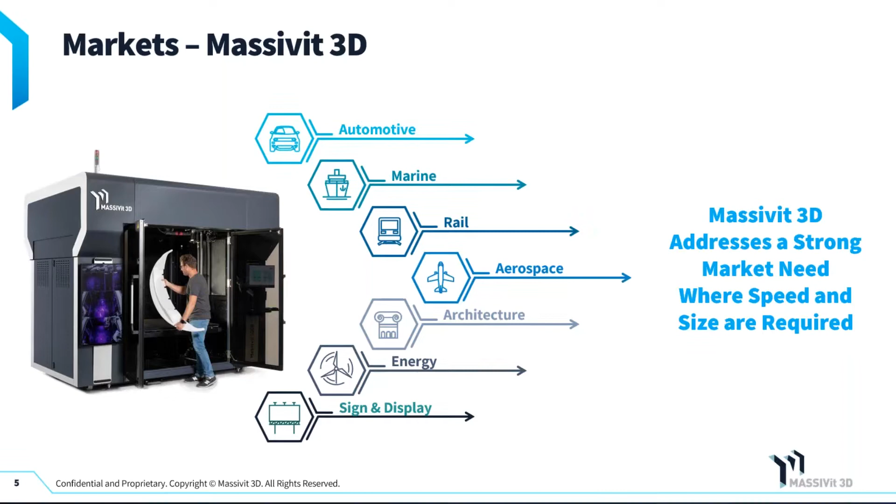Our first poll question is, how do you currently make molds? The options are hand layup laminated fiberglass, CNC machining, additive manufacturing systems, or I do not manufacture molds. Please take a moment and answer right on the screen and let us know how you currently make molds.

So it looks like 44% of our responders do not manufacture molds. Wow, so they may buy them from the outside, or they may just be curious about the technology. But this is going to help me shape my presentation a little bit. It's going to be broad in general for the entire audience, but it's nice to know what exactly is going on. However, 27% use hand layup and laminated fiberglass. Our research has shown that hand laminated molds are the most popular, cost-effective way, but it's still very labor-intensive and takes a long time. So we can review this again towards the end if we need to, but let's move on.

Whether you're machining a mold out of aluminum or tooling block, or using that tooling foam to make a master plug that you then make the laminated mold from, it's very labor intensive and takes a long time.

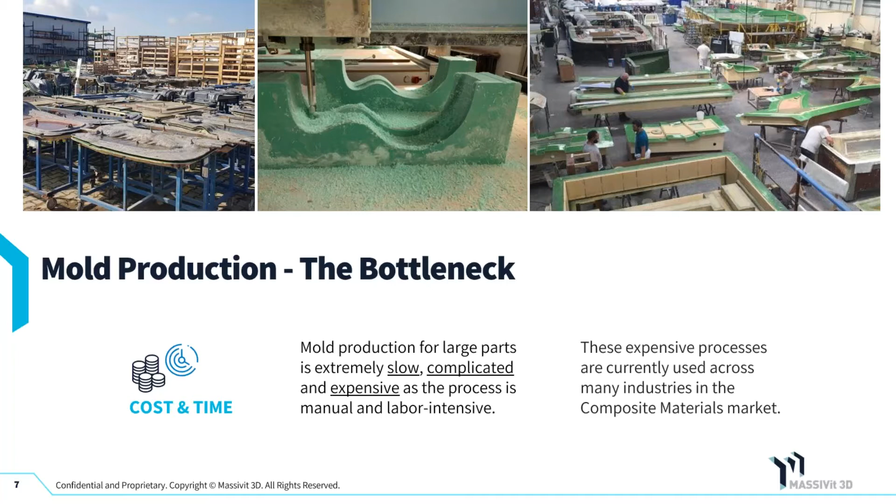So what we're hoping to do is take what you see on the screen here, which is some traditional manufacturing methods, and tighten it up. And what I mean by that is, right now, you go from CAD design, mold production to end part, and in a good year, it takes 5 weeks to make a mold. Sometimes it takes 8, 10, 12, 16 weeks.

If you are purchasing the mold from a vendor that just makes molds, what I've heard is the wait time is up to 30 weeks. Some of these vendors that are making molds for other people won't take new customers. They're so busy.

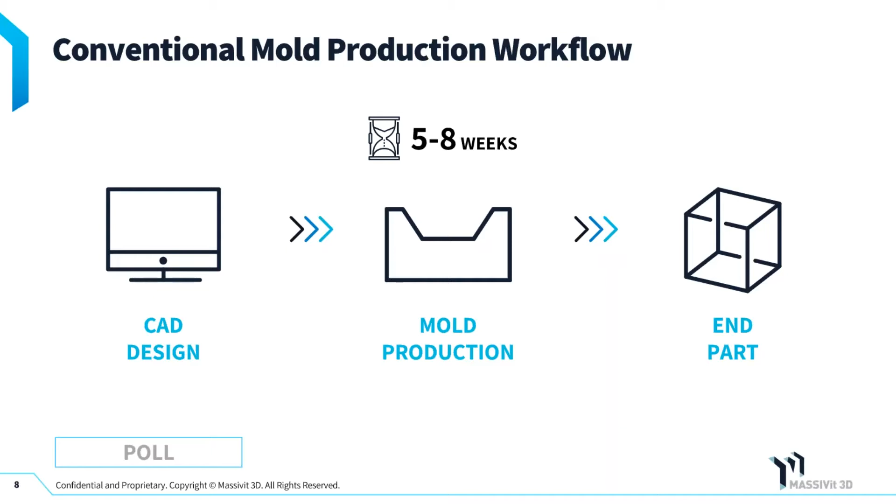So with that being said, if we break it down a little bit more, the mold building process of laminating a mold, from CAD design to having the mold ready to make a part, is a minimum of 19 steps. And I would argue that it could be closer to 35 or 40 steps. It depends on how you define a step.

What I mean by that is in the last step, number 19, prepare the mold surface. When you pull the mold off of the master plug, it still has to be buffed and polished, and then it needs to be sealed. So it needs to be cleaned up, and then it needs to be sealed. And then there's 5 or 6 steps of mold release on that before it's ready to make a part. So step 19 could be 5 or 6 steps.

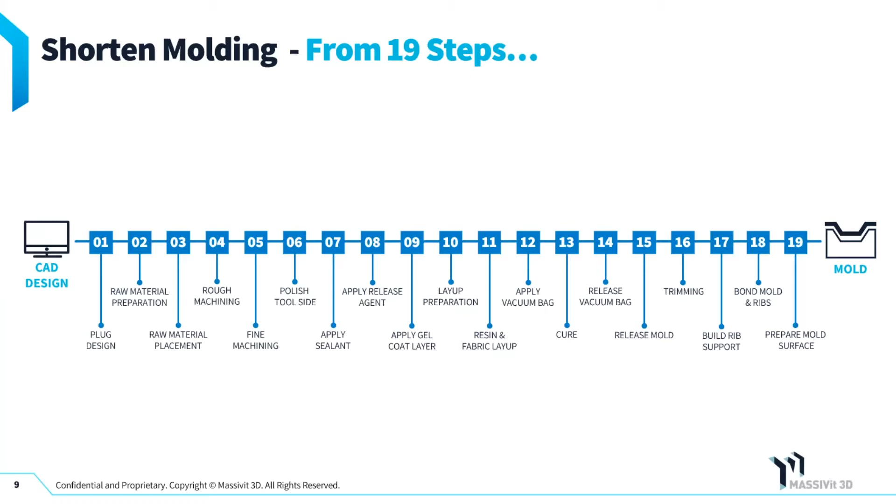So what we're trying to do is condense all these steps and remove as much labor as possible.

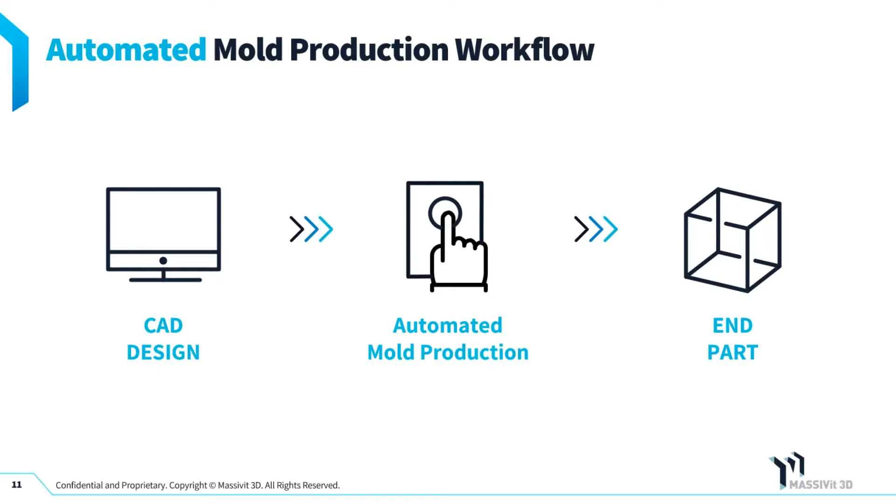So we're going to do that by automating the mold production. So CAD, 3D print, then you have your end part, which is not the part that's made from the mold, but the mold itself.

So here we couldn't eliminate every single step. What we have is we print it, and what we're using is a 2-part epoxy to make the mold. I'll explain that a little bit more in detail. But you want to post-cure that epoxy so you have better mechanical properties.

And then we need to somehow remove the outer material, what I call the shell, that formed the mold. We have a special chemistry in the material that does that. It's a water breakable material. And then when you're done, you have a mold, but like any 3D printed part, it's not a high gloss finish. So the last step is to finish the mold: sand, buff, and polish.

In some aerospace applications, our customers are machining the mold after it's 3D printed, and they're still saving a tremendous amount of time.

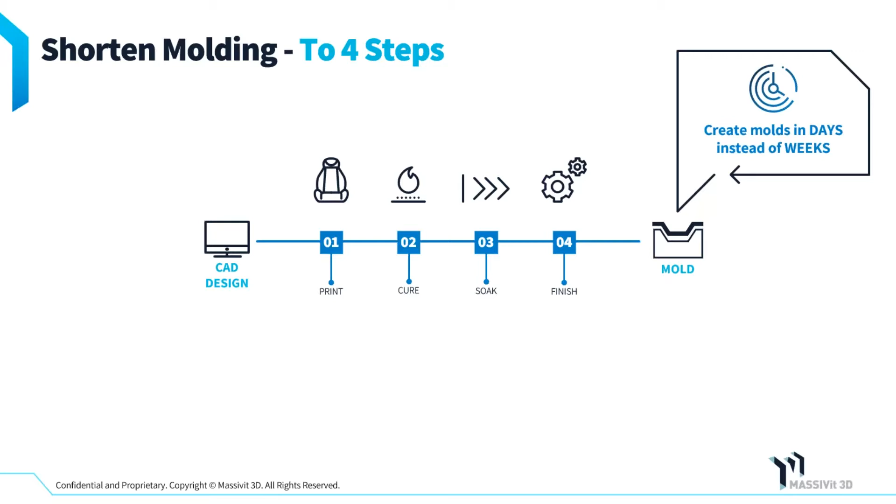So how does it work? This is where we're going to get into the nuts and bolts. The original technology we had was called GDT, gel dispensing technology. What that does is it dispenses a very thick material, almost looks like toothpaste, and it's UV cured instantly.

So what we're doing is we're printing about 8 to 10, 12 layers, depending on the size of the part, of the shell material, the UV cured material. And then it stops, that head moves out of the way, and we fill that gap, that shell, with a 2-part epoxy. It has great mechanical properties, but one of the key problems in 3D printing is the layers you create make for a weak part in the Z direction.

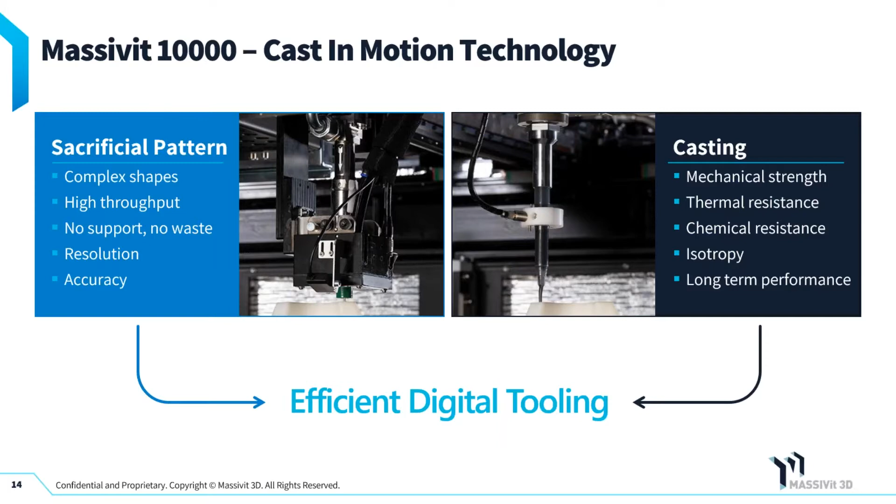So you see it here again, they flipped it over. On the right, you see the UV cured gel. It's called Dimengel 50 WB, water breakable. The original material for the GDP, the gel dispensing printing, is not water breakable. It's hard, like an acrylic. But we needed a way to easily get the mold out of the shell.

So they changed the chemistry to make it water breakable. Now they don't say water soluble because it doesn't break down into the water. The water literally makes it swell up and fall off. We'll show you some videos of this in a minute. So that's the Dimengel 50 water breakable.

On the other side is the Cast in Motion 155, or now we call it the CIM 500. It has a heat deflection temperature of 145 degrees C, just under 300, and it has a fairly low coefficient of thermal expansion. I know that's kind of ambiguous, but it's close to aluminum. It's around 25 parts per million for the CTE, and it's truly isotropic. We've had it tested by a third-party organization, and it's an isotropic mold.

So the thermal expansion in the X, Y, and Z are exactly the same. The tensile strength under compression is the same in X, Y, and Z. And it's something that hasn't been done in 3D printing.

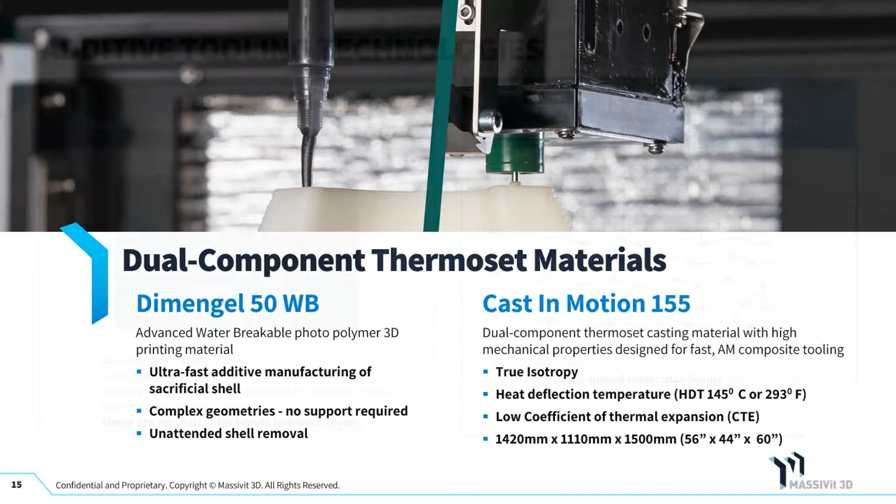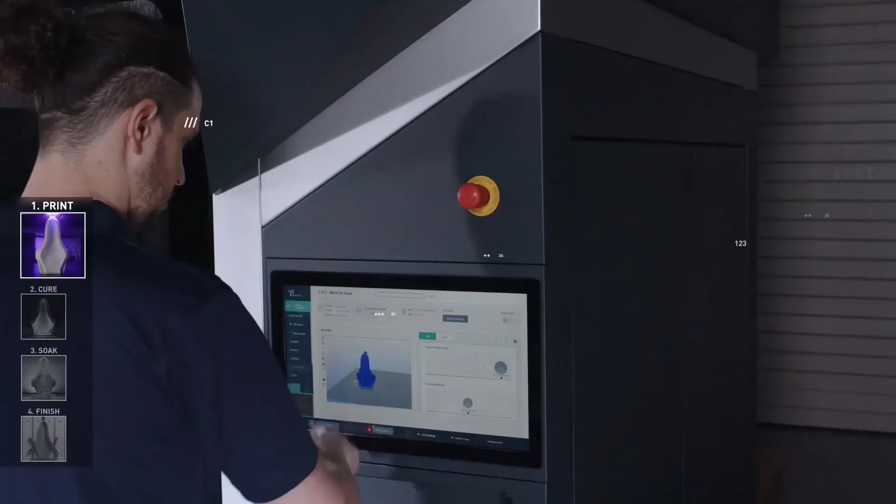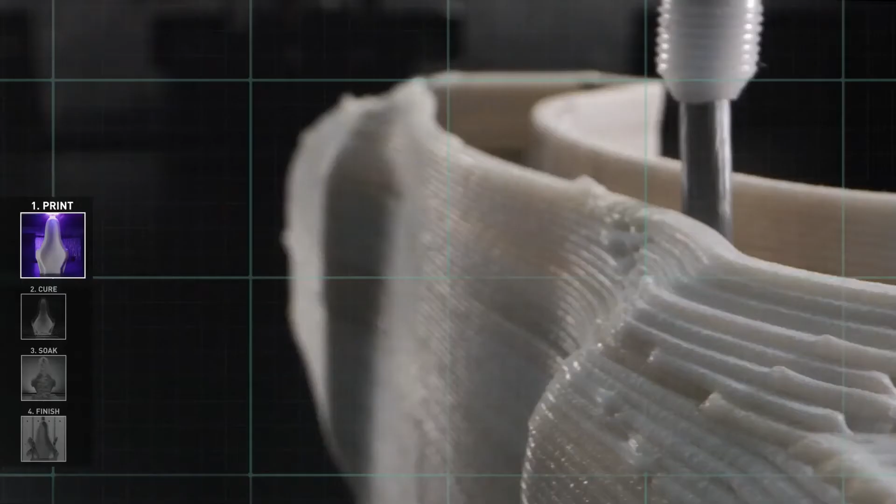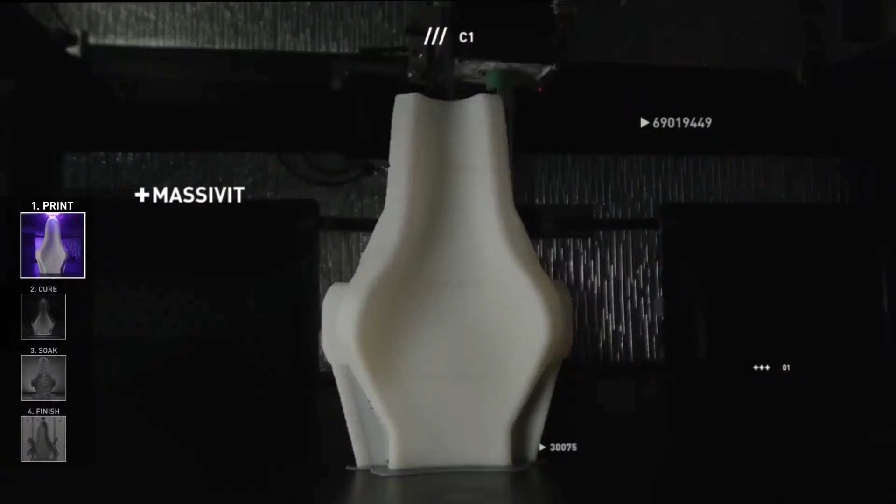Based on an initial CAD design, the first head 3D prints an outer sacrificial shell at high speed. The second head intermittently casts a thermoset material into that shell as it builds. The shell is comprised of two thin walls made of water-breakable photopolymer material that polymerizes instantly under ultraviolet light. The thermoset material forms a solid, isotropic mold. The mold can then be post-cured in an oven to improve its mechanical properties at elevated temperatures. It is then simply immersed in a bath of plain water, causing the shell to crumble away. The Massivit 10,000 offers near-net shape casting. Your high-temp, high-performance isotropic mold is now ready for use.

Okay, did that work? I mean, I saw it. Did everybody else see it? I sure hope so. Yeah, look great, Mike. Awesome, awesome. There is hope.

So what that showed was the shell being printed and then the pouring. We're controlling the exotherm, which also helps us be more accurate.

One of the typical questions I get from a prospective customer is, how accurate are your molds? Usually coming from the aerospace world, but we're about 1 millimeter per meter. Our system has rough standard dimensions: 5 feet in the X, 4 feet in the Y, and a little more than 5 feet in the Z.

Our main product, the GDP printers, are 6 foot in the Z because we don't need as much height. We lose some height with the Massivit cast in motion machine because of the static mixer for the epoxy.

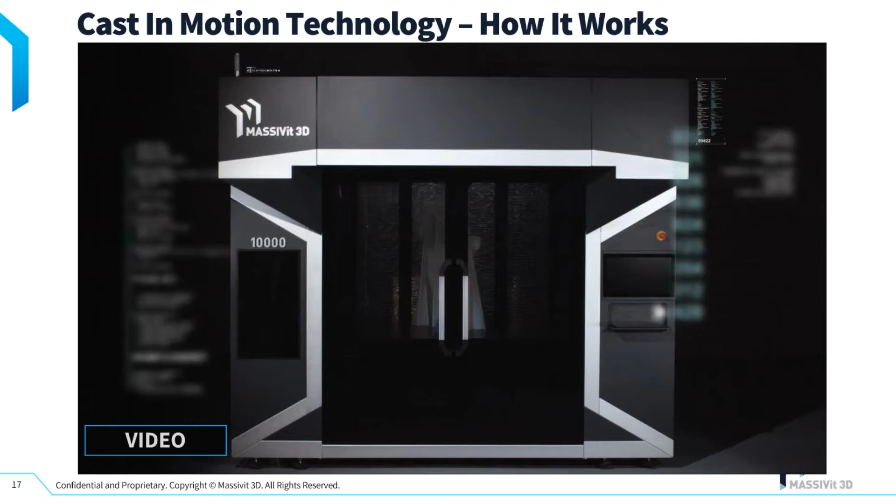So that being said, let's move it along. The key benefits in our system: we reduce the time by 80%, and labor cost, well, if you're hand laying up a mold, even if it's not a large mold, that's very labor intensive, from making the plug, to gel coating it, to laminating the mold, to pulling it off and prepping it up. We reduce the labor tremendously, and we're reducing the cost also.

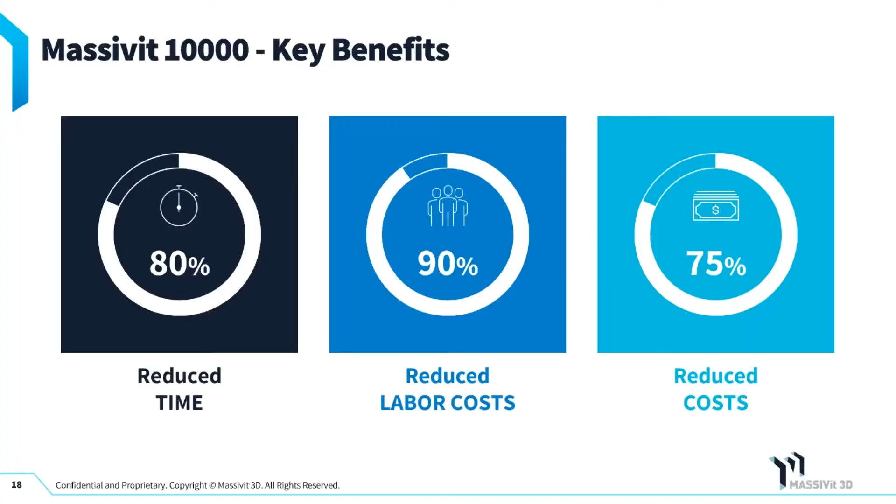So now I want to show you some samples of some of the molds that we've printed, and it's a good time to mention that this is a brand new technology. We have a beta customer in North America, a beta customer in Europe, and a beta customer in Israel. It's been fully vetted. We have reservations in the tune of something like 25 reservations, and we're starting to ship machines. So it's a new technology, but it's real. It's fully baked in. We have some wrinkles we're working out, but nothing that's slowing us down from shipping machines.

Here is a mold for a race car seat. On the left, you see the as-printed mold with the shell material on it. The center photo shows the mold with the shell removed, and then a part that's made from that mold. What I like to point out is the support structure that you can print into the part to save you even more time. A lot of times you'll get a mold and then it'll be backed up with square metal tubing, or 2x4s, or some other structure to make it more rigid and easier for the operator to make parts on.

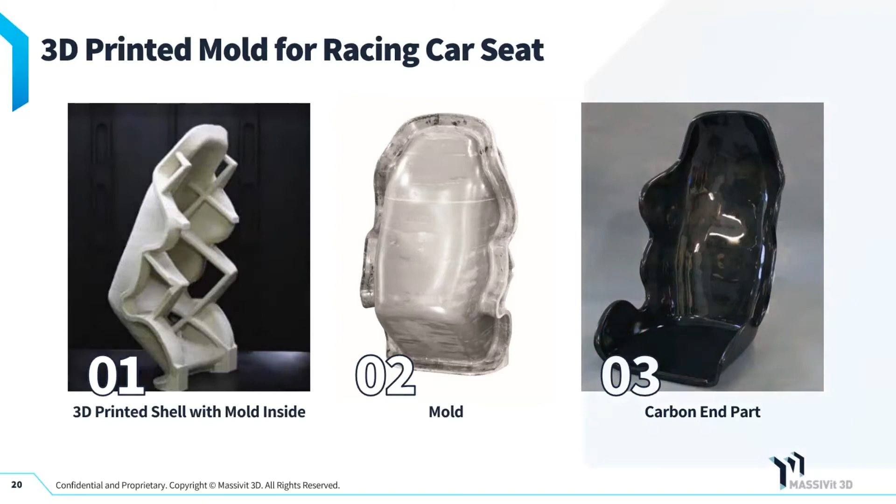But more importantly, it took 42 hours to print. So typically, after the print, regardless of the size of the part, it's going to take 10 hours to post-cure to get the mold material to ideal mechanical properties. And then it takes somewhere around 24 to 30 hours to remove the shell.

You just put it in a tank of water. There's no chemistry, no caustic chemicals breaking down the shell material. It's just tap water. There's no heat, no agitation. You just let it soak.

If you're in a hurry, after about 8 hours, you can start to pull the shell off. It's soft and gooey. But if you wait the full 24 to 30 hours, the shell material falls off the part and rests in the bottom of the tank. It can be strained out of the water, dried, and thrown away as a non-toxic, inert waste.

It's not a biohazard at all. It's inert. You could use it as a filler in asphalt if you wanted to recycle it, but it's not toxic. That's the main point.

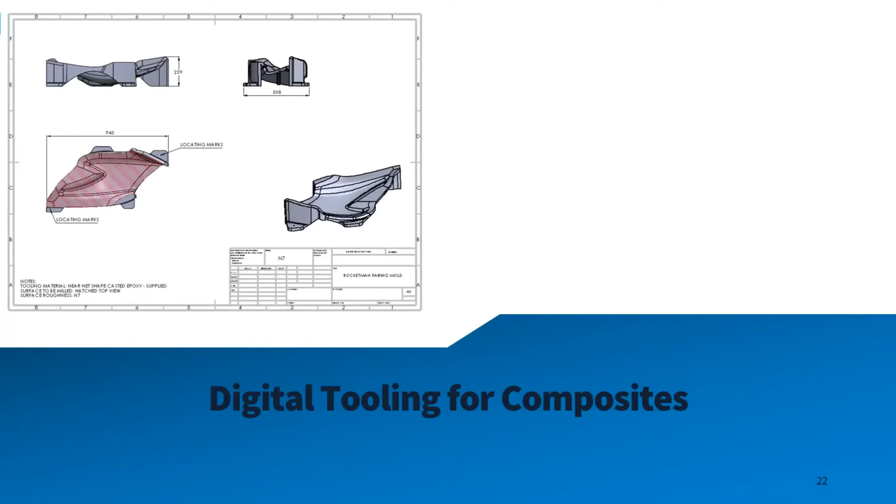Here's a print for a fairing on a motorcycle, and I think we're going to show you that one too.

So here's an example of the as-printed part on the left, and in the center what you're seeing is the part as it's breaking down in water. It's just slowly swelling up and falling off the part. And what you see on the right is the as-printed mold.

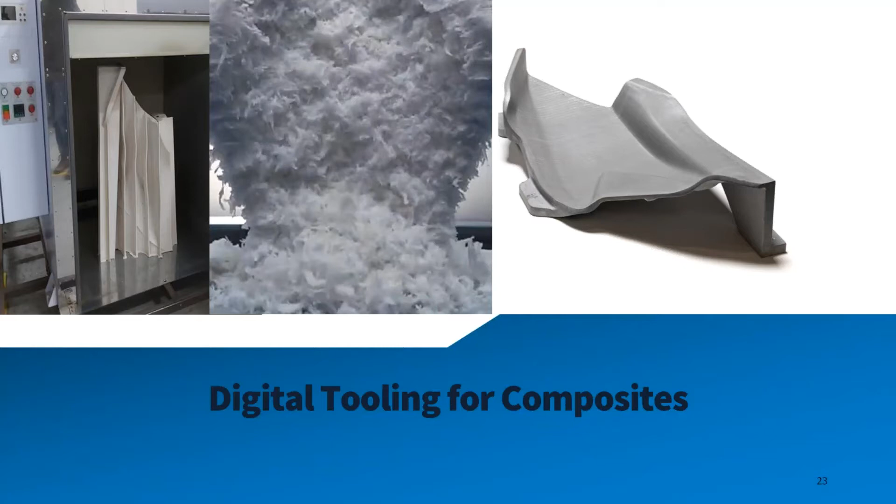It had to be cleaned up to make it a true mold. What I mean by that is the actual mold surface is smoothed, not the backside or the flange, but the actual mold surface has to be sanded, buffed, and polished. And that's what you see there on the right.

You can also combine certain features of the mold to have a tool in there. What we mean by that is, here's a bicycle seat mold. What we did is we mounted some inserts into the table, and then we printed around that.

That enabled us to have a good datum in the mold for finishing machining the mold. We also added some clamping features on the mold so that when you're machining it, you have a place to grab. So there's a lot of flexibility in creating features on the mold to make manufacturing easier, and it all can be done in the printer.

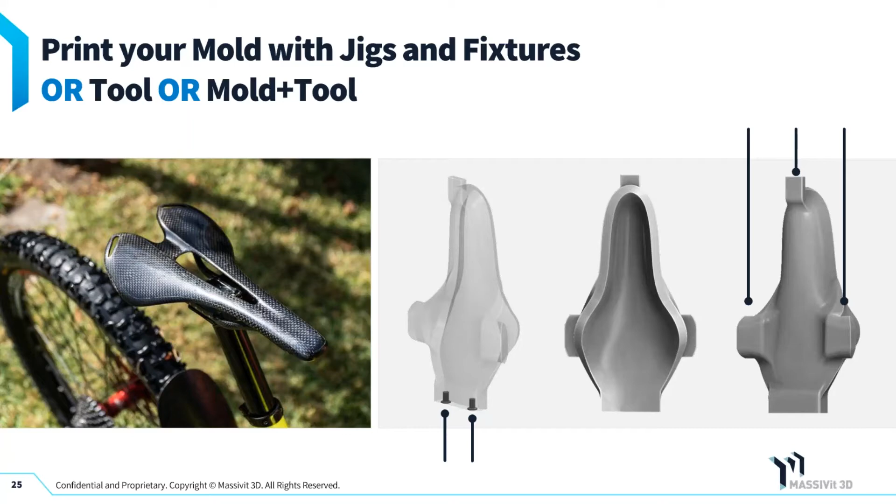Here's another example. We have an aerospace customer that needed a washout mandrel. The challenge was how do you get this core or mold out of an odd-shaped part, like ductwork? On the right, what you see is the 3D printed soluble material as printed, no epoxy, just the 3D printed material.

They make the part on the mandrel, on the part that was printed. And when the part is fully cured, you can soak it in water and remove the mandrel from the part.

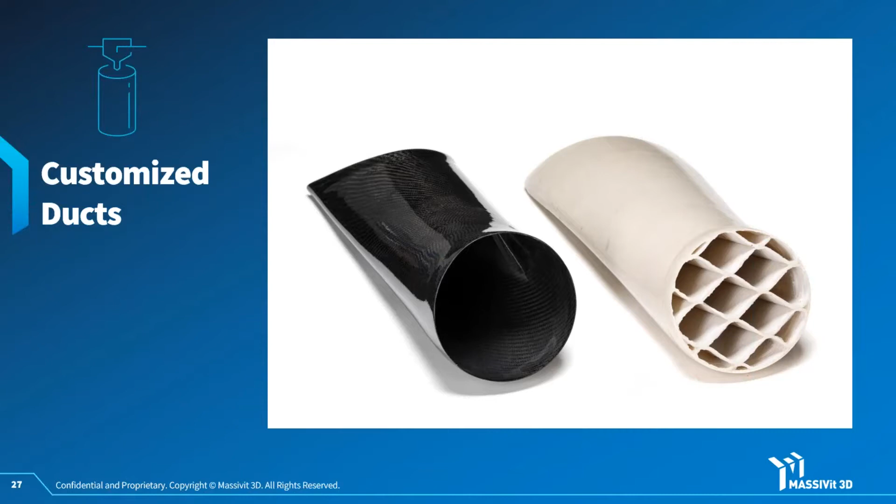Here's another graphical representation of a mandrel that you could not get out any other way but breaking it up or dissolving it in some way.

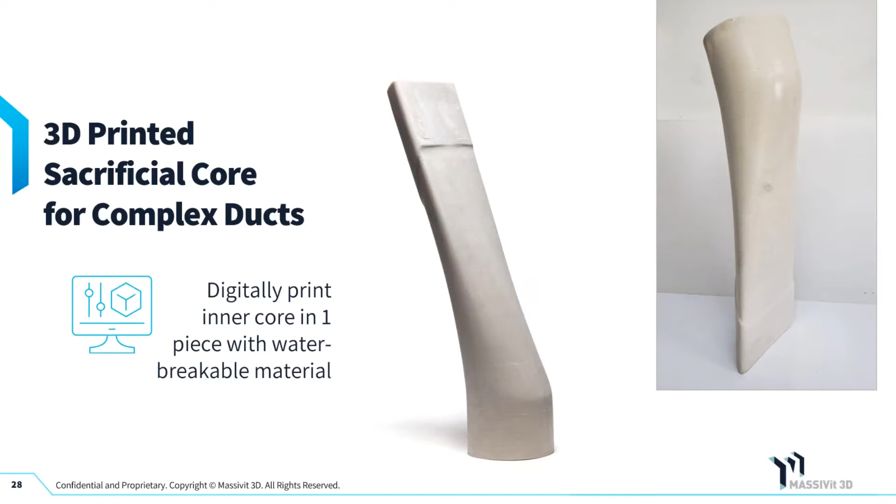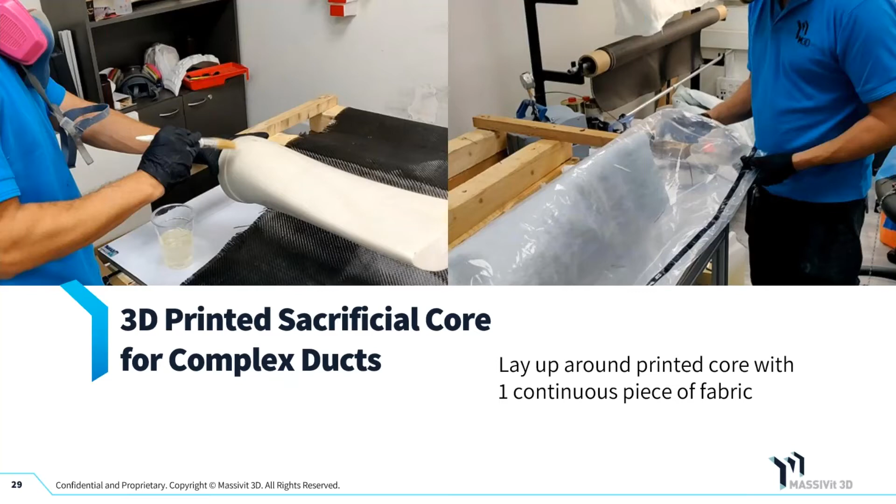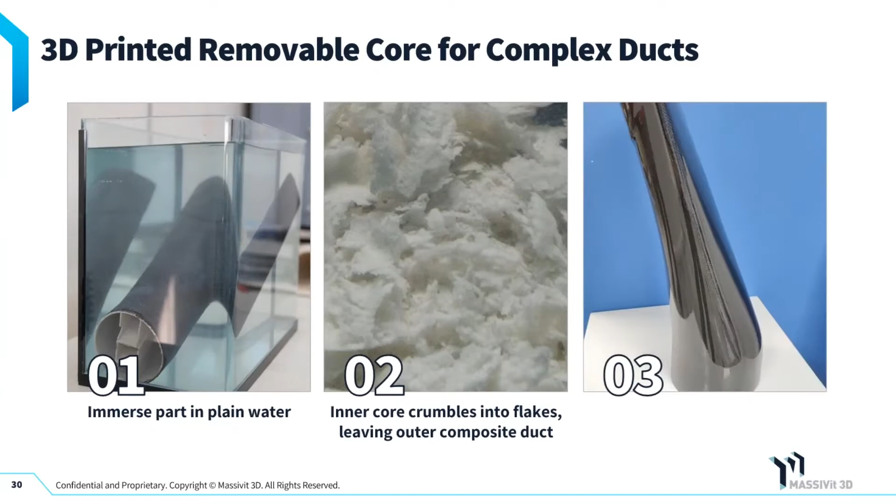Here is the mandrel. They did have to clean up the surface because it's as printed, and a 3D printed part has those layer lines, so they smoothed it. And here they're starting to lay up the part, then they bag the part, and then soak it in water. That's the breakdown, and what you have left is the part that you need.

Now I want to pivot a little bit, because our core technology of gel dispensing allows companies that don't even want to make a mold. They just want to make a part.

So now it's a different machine, not the machine that makes the mold. The machine that makes the mold is called an M10000. It's a mold tool builder, that's what it's designed for. It only runs the water-soluble, water-breakable material, and the epoxy.

But our original technology of gel dispensing allows you to do things like make a console for a boat, a center console or a helm, maybe for a customer who is handicapped and has certain ADA requirements, or maybe he just wants features a certain way and you don't want to make a mold just for one customer. You can 3D print that part and then glass over it, gel coat over it, and you have that part. I know there are other traditional ways of doing that, but this is a lot faster.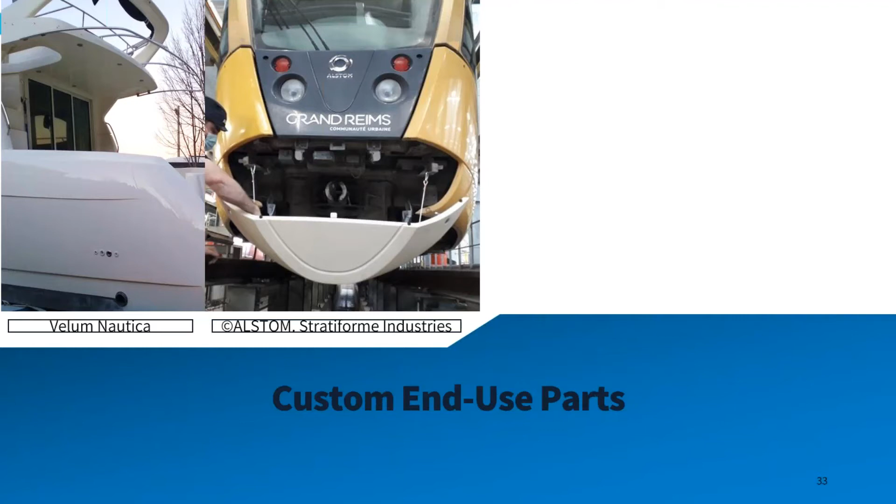We also have some legacy rail parts for Alstom that they don't have the molds anymore to make. We 3D printed it. The material is fire retardant. You glass over it with fire retardant resins and pretty it up, and now you have a part without having to make a mold for that one part.

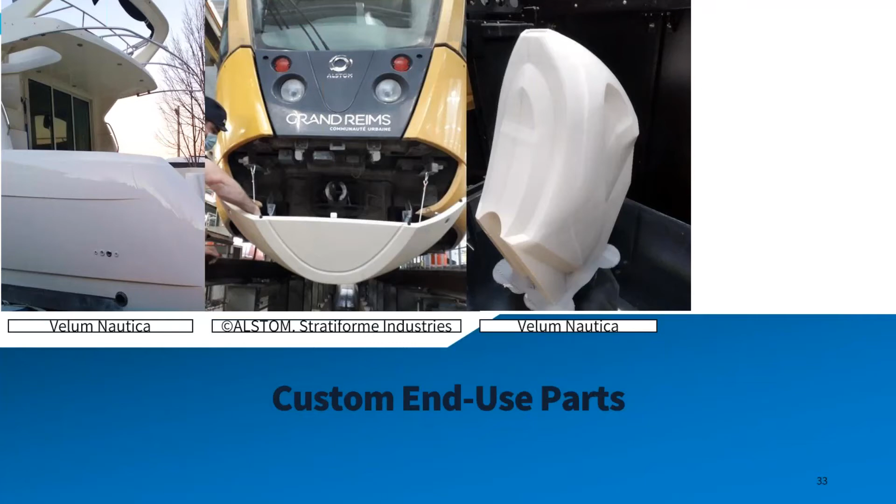Some more examples of what Velum Nautica is doing for marine, a special design part that they're going to bond onto a boat. You can also see on the right another part that Velum Nautica was designing.

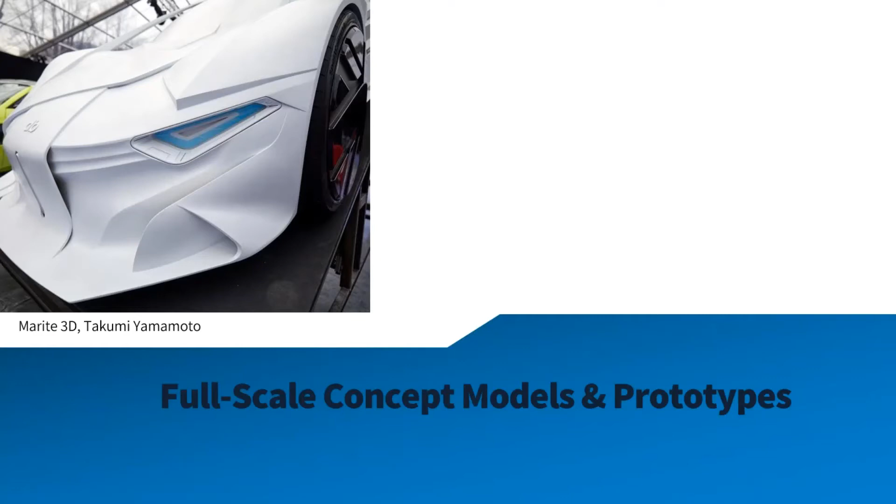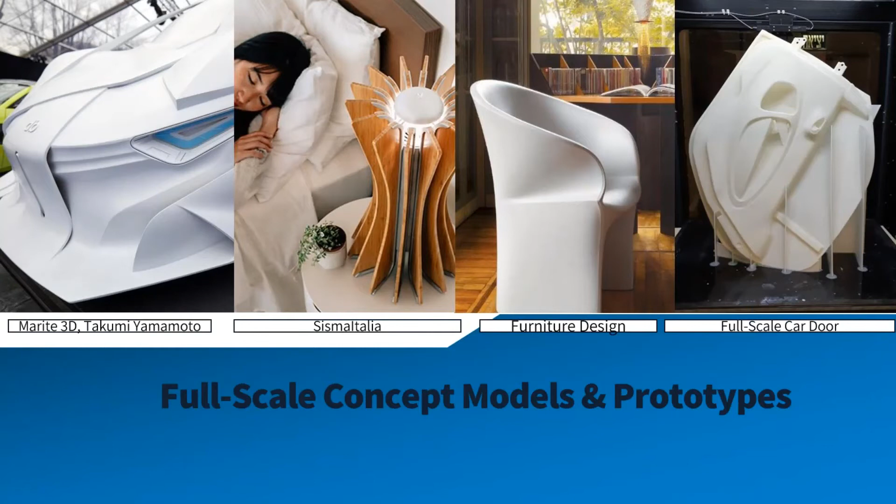Some other things our customers are doing: special ground effects for automotive, special lighting or furniture. The concepts are endless. On the full right there's a full-size car door for an automotive manufacturer prototyping different designs. So instead of making it out of clay or tooling board, or 5 parts on a previously large 3D printer and then bonding them all together, you can print it in 1 part on our machines.

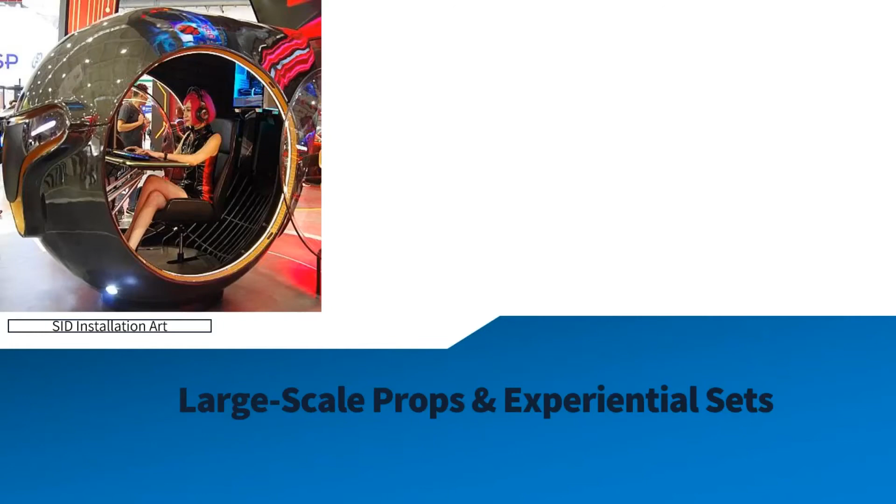Here's some scenic fabricators doing some exotic stuff. Again, this is our initial material. It's not why you joined the seminar, but I thought it important to show you a little bit about what our technologies can do.

Here are the industries we're in right now with the GDP and the cast in motion technology: aerospace, defense, infrastructure, marine, just about all of them. And there's a lot of subsets in there also.

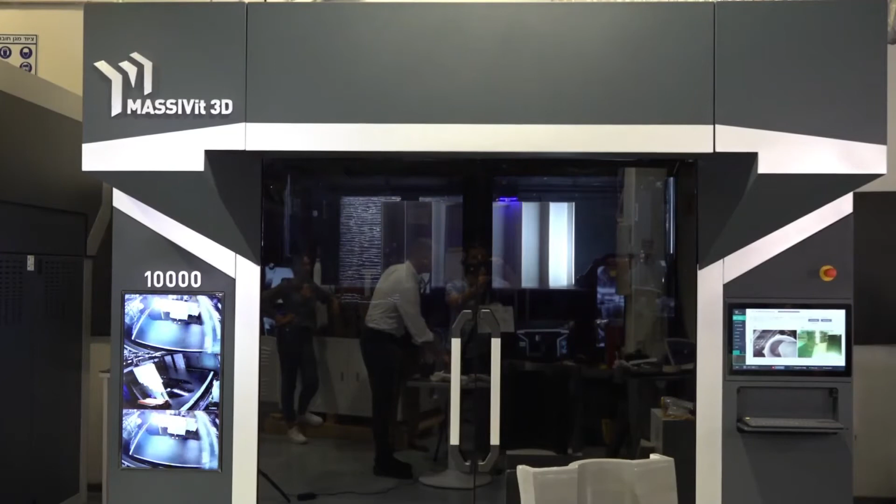The Massivit 10,000 is using a dual head system. The first head is a dispenser. As you can see here, there is a big screw inside that is pushing material, the Dimengel, through a tip which determines the resolution of the print.

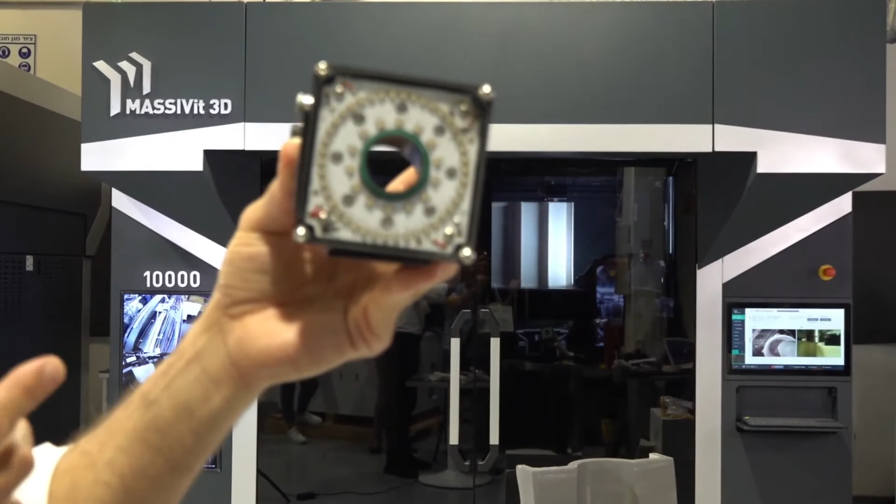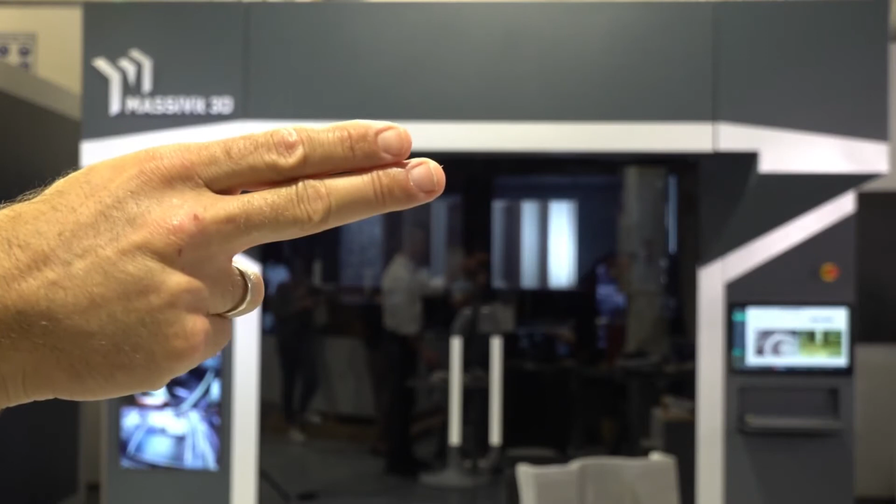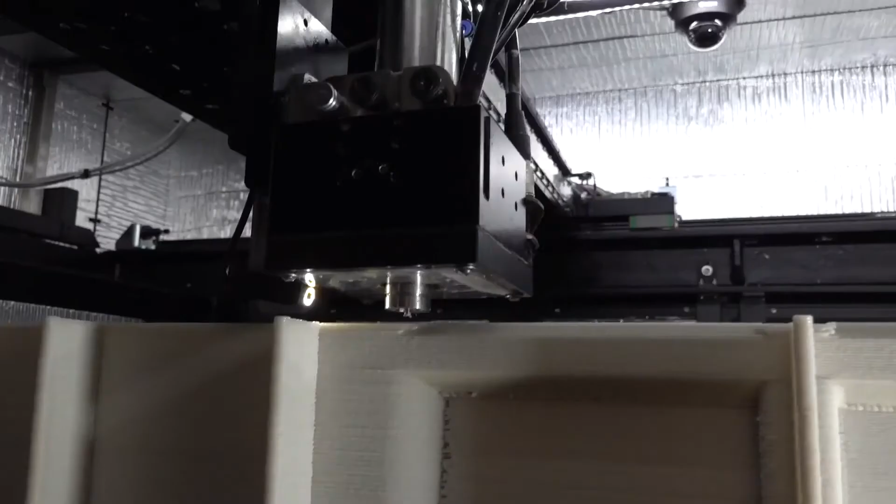We are printing gel. The gel is sensitive to UV and will be cured by a UV ring, as you can see here. You can see 2 rings that give you the optimal UV intensity for optimal drying. This means that since we cure with UV light, we can print 1 layer on top of another the same way as printing 1 layer next to another, without using almost any support or infill to support the roof. It means a lot of material saving and a lot of time saving for the post-process.

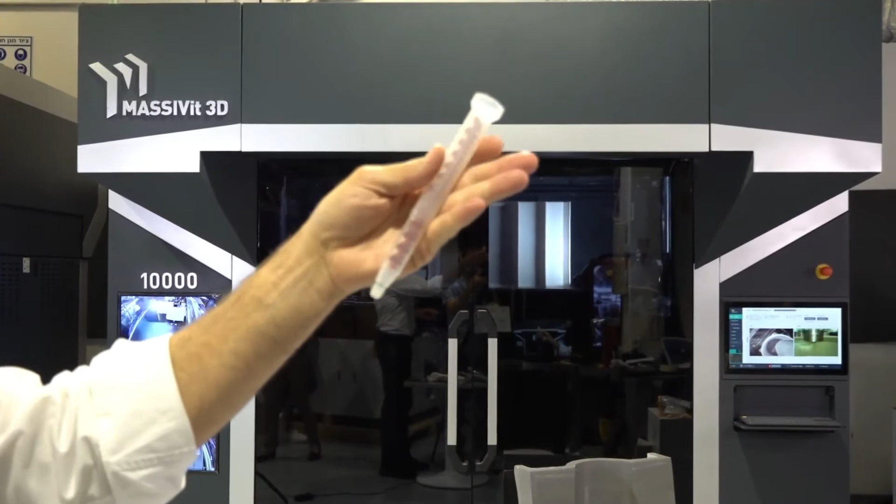So this is one head. We talk about dual head technology. The second head is a casting head. This is a mixer where part A and part B of the epoxy casting material are poured in and cast into the gel dispensing printing material. How does it look?

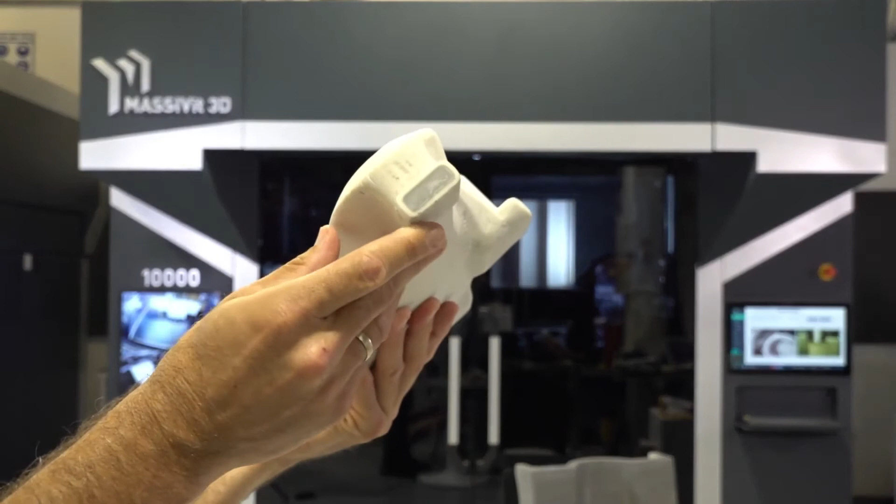To give more explanation, as you can see here, with the first head, the gel dispensing printing, I'm printing the shell, and in the second process, immediately after, we get the epoxy casting material cast between those shells, actually creating a sandwich process. From the other side, we can take a look.

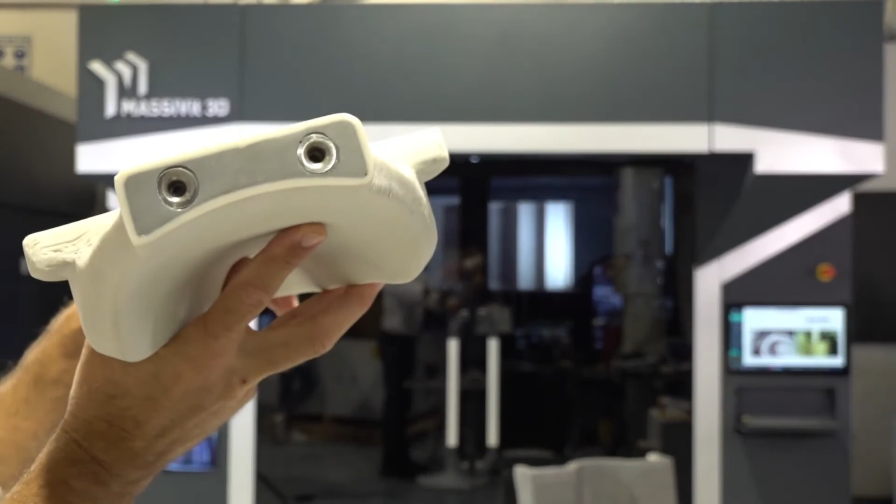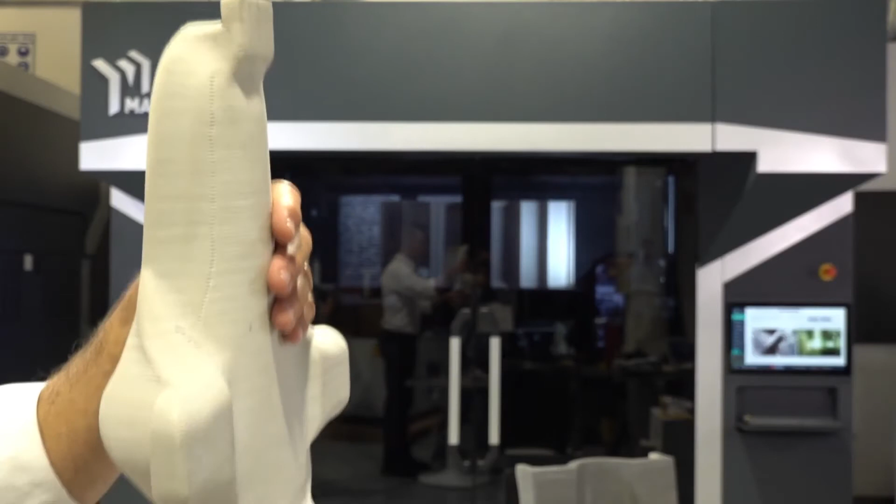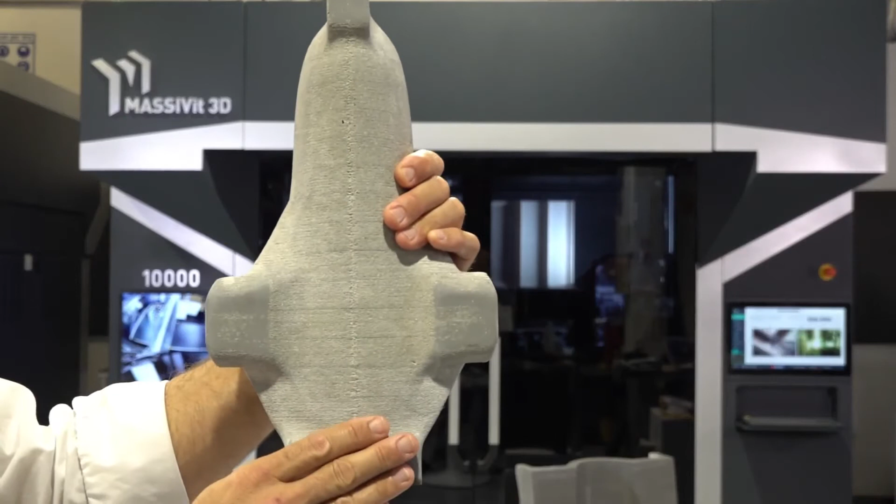At the end of the process, we put it into an oven for a full curing and dip it in water. What is happening when we dip it in water? The shell will crumble off, and I will remain only with the epoxy casted material that was casted before. This is how it comes out of the Massivit 10,000, and this is how it comes after it is polished.

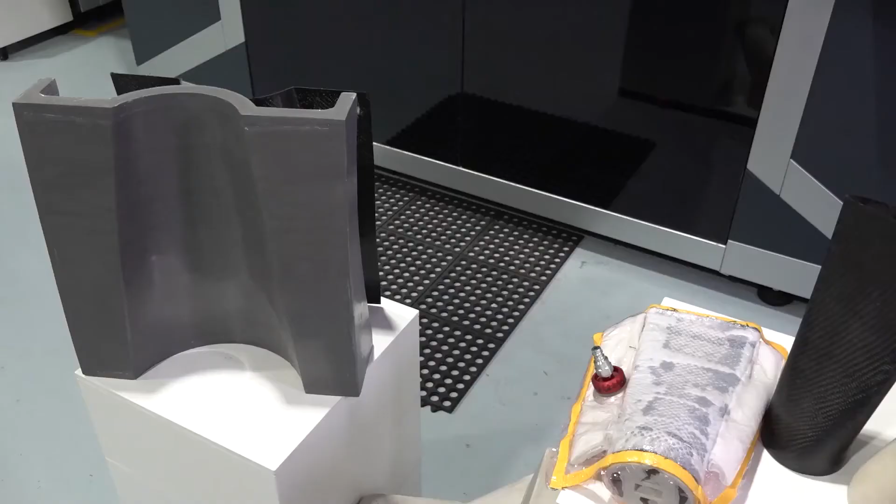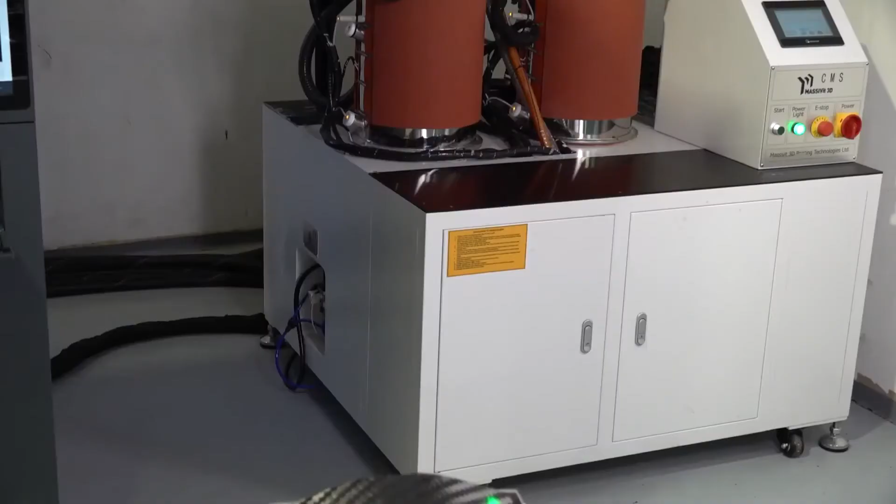And of course, you want to create composite material. So this is about the technology, and in order to do it, we talk about a print volume of 44-inch by 56-inch and approximately 59-inch height, or in centimeters, approximately 1 meter 10 by 1 meter 40, with a height of 1 meter 50. In order to operate the Massivit 10,000, you need the unit itself, as you can see behind me, but also a casting unit that is standing by the Massivit 10,000, which we are going to see in a few minutes.

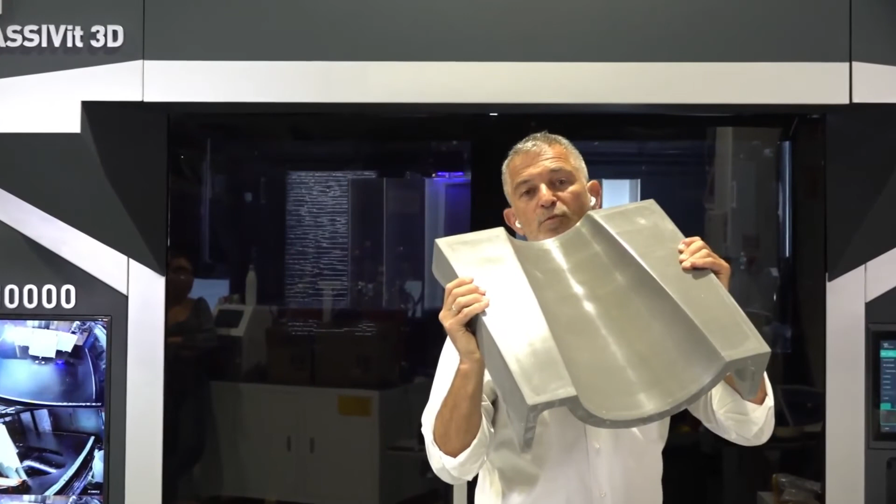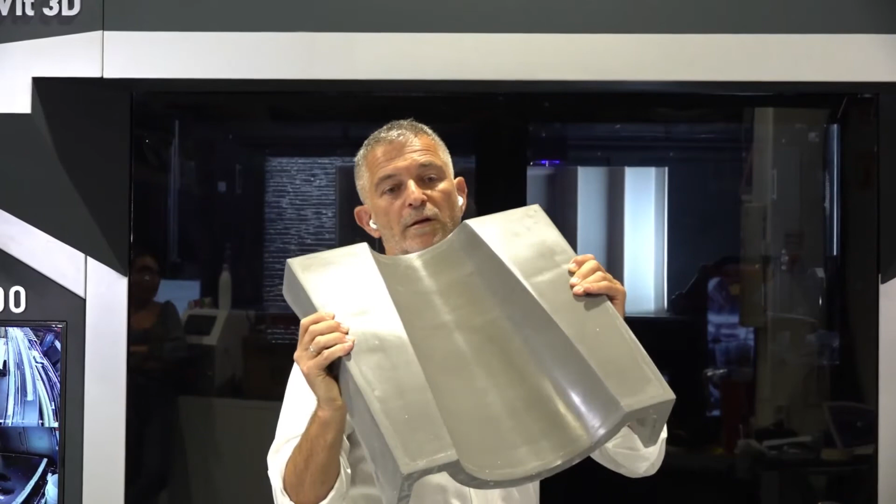We talk about mold manufacturing, and I want to show you a few samples done by the Massivit 10,000. Here we see a mold that was printed within hours. You can see it, of course, after we remove the shell and polish it. The part that came out of this mold.

But when we talk about the Massivit 10,000 mold manufacturing system, you also have the capability to produce more than molds - you can also produce mandrels. I'll bring one sample with me. This is a mandrel, a small one that was printed within minutes or a few hours depending on the size, and it is built only out of the water breakable material - no casting material, no epoxy casting material. So this is a mandrel, actually a mold that will not be dissolved but will crumble off with water.

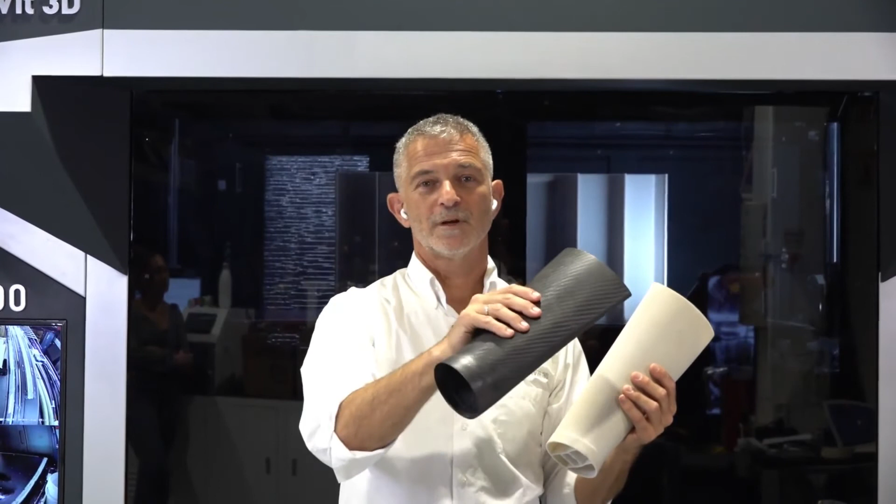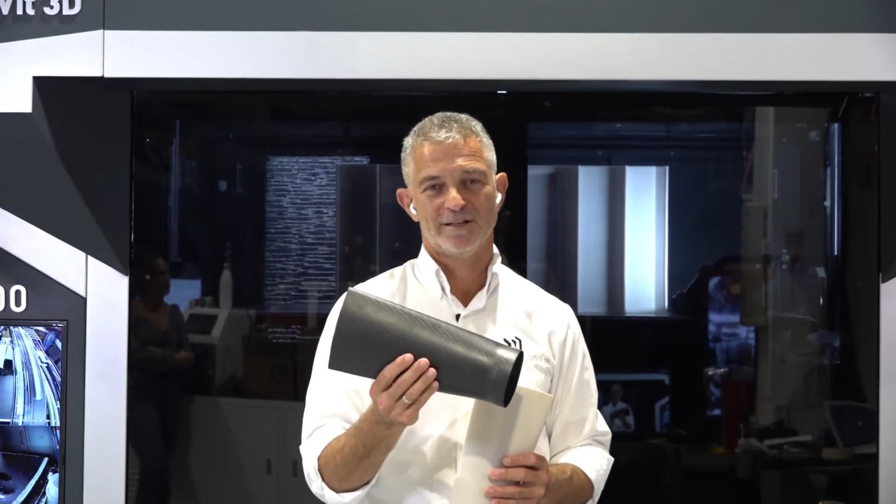So you print it, hand lay up with your textile, dip it in water, and you will remain with your part within a day. Imagine producing a part out of composite material in the same day. Of course, the process includes standard procedures, as you know, with the vacuum bag, and this is here, of course, only as an example.

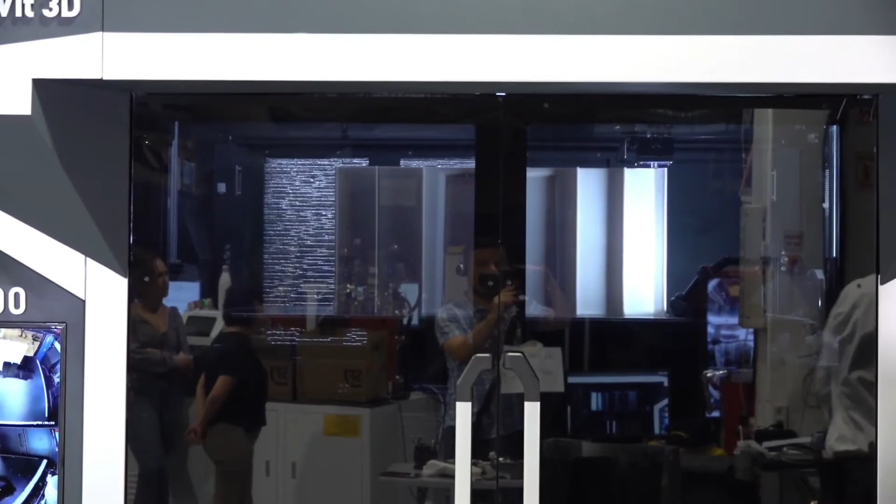With the Massivit 10,000, we are talking about open molds, as you just saw before, but also closed molds for RTM process. As you can see, sorry, I cannot pull the two of them together, but you can see one part of a compression mold that is creating this composite material part.

Another application that is doable with the Massivit 10,000 is end parts. So if you need end parts, you can produce those end parts with the Massivit 10,000. Or if you want to create a toolless product, you can also hand lay up our GDP material and leave it within your product, and by that get the strength for your toolless product.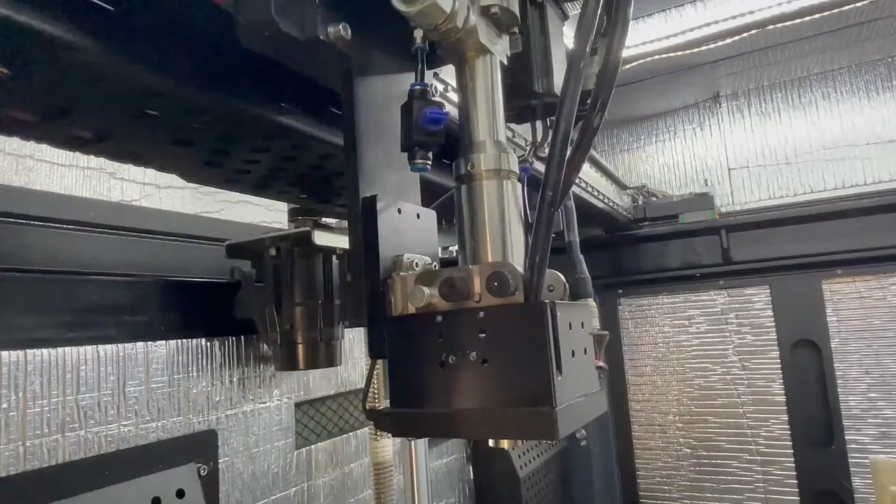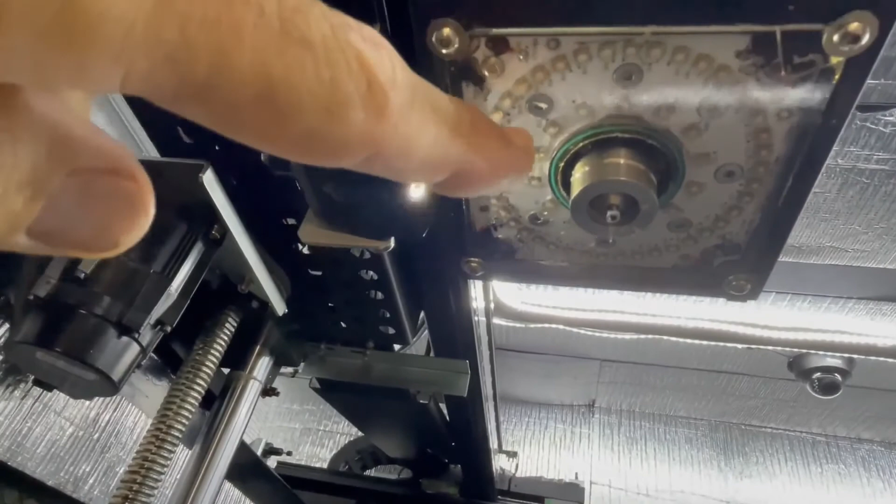What I suggest is that we focus and get to see both technologies - the dual head technology, and the Cast-In-Motion process that is happening within the machine. You can see the dispenser here. You can see the tip that determines the resolution, and you can also see the UV ring with two different rings in order to give the right intensity. You can see here just a mold that we are printing.

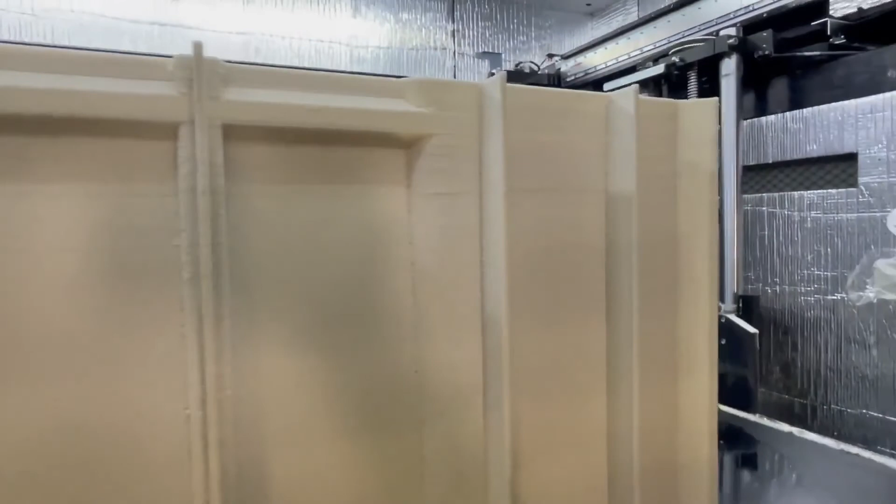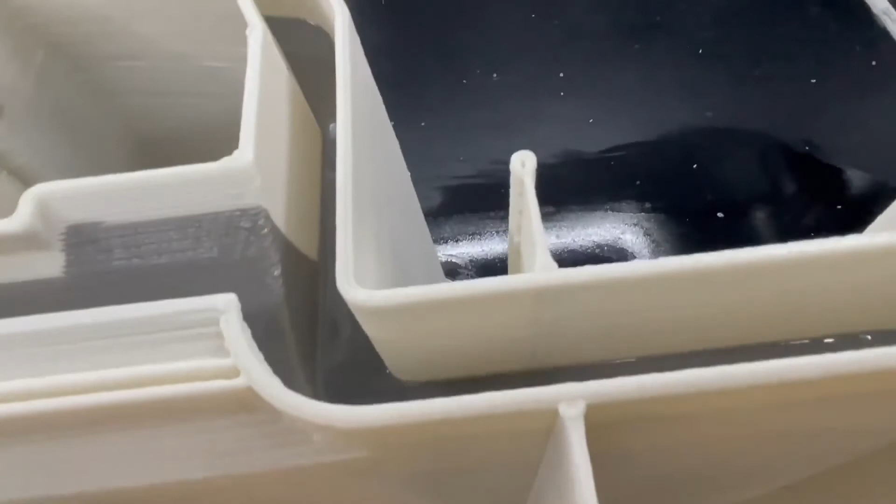I'll come back to that. And we can see the mixer, actually the casting head, where part A and B are coming and getting mixed at the right time when needed. If I just put my camera on top here, you will be able to see - it's very difficult for me to show, but I'll try - you will be able to see the shell and the casting area where we do the casting.

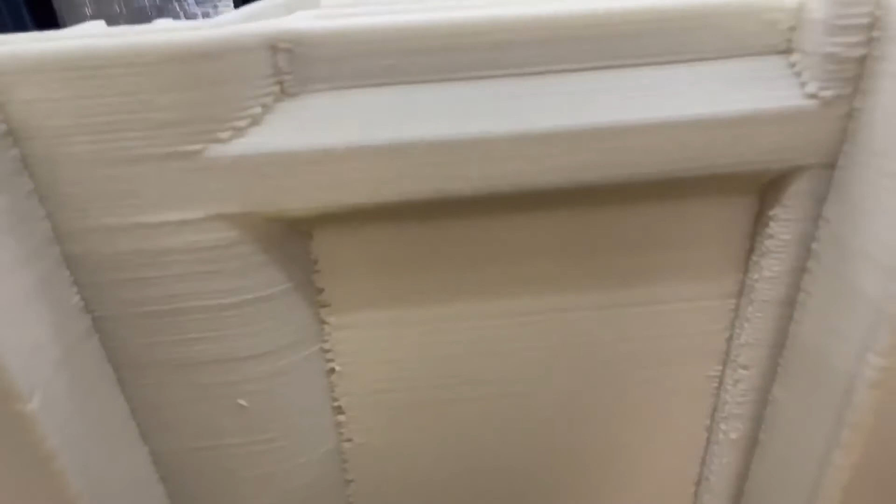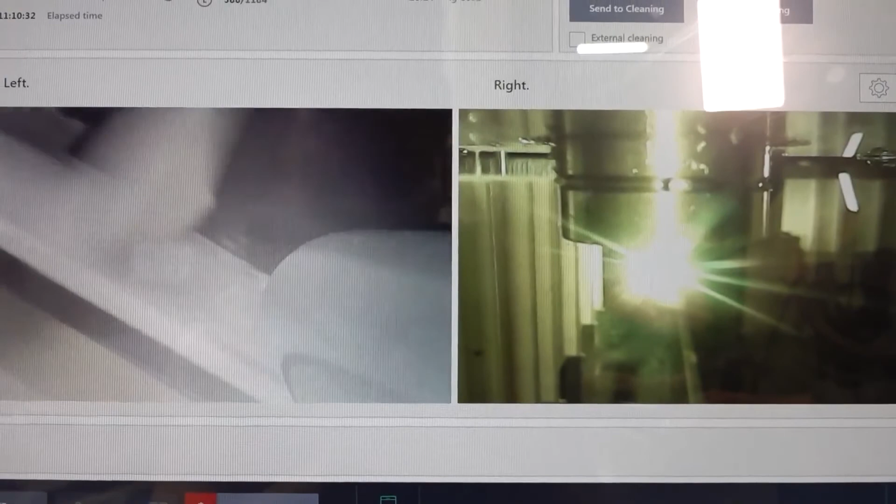This entire process is called Cast-In-Motion, because we cast as we go. Again, the table, as you can see here, we can close and continue the printing later. Important to say, when we talk about casting material, we talk about high quality casting material. We want to have an isotropic mold, a mold that will expand evenly in all directions, X, Y, and Z.

And the Cast-In-Motion technology, the way we cast the material, enables us to create the isotropic behavior of the machine. We do want to see the printing process. What we can see here - if you can see the purple light, this is the UV ring that is curing the gel. You can see that the head is moving aside, and now the casting head is going into action.

And casting material, part A and B of the epoxy, will be merged and mixed at the machine, at the printing head, and epoxy will be cast between the two walls that were just created by the first head. So it's a dual head technology - the first head creates the shell, the space for the casting process, and then casts high performance material between those two walls. Once this process is ready, we will see the printing head going into action again, printing the next layers again and again.

We will now present the mixing system, what we call CMS, where part A and part B get ready for the casting process during printing. Next to the Massivit 10,000, you'll always find another unit - this is our CMS system. Here you'll find mixers or preparation for part A and B of the epoxy casting material. Right temperature, right viscosity will make it ready to be sent to the Massivit 10,000 on time and mixed just when needed. We're talking about high quality epoxy material, low CTE, high HDT, creating at the end your isotropic mold for composite material.

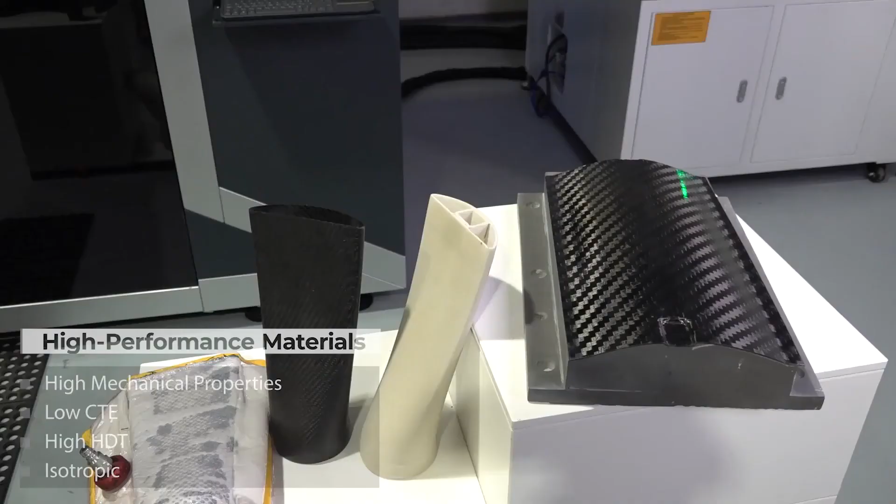So that brings us to the end of our tour. I hope you were able to understand the technology and capture as much as we wanted to share. Of course, if you have more questions, we'll be very happy to support you with answers. Thank you again for your patience and for being with us.

Sorry, I had myself muted there. I thought that was great, a little long, but important to see the parts and not just see it on a slide deck in a presentation. Nir does a very good job of showing all the different details, and I really appreciate his help.